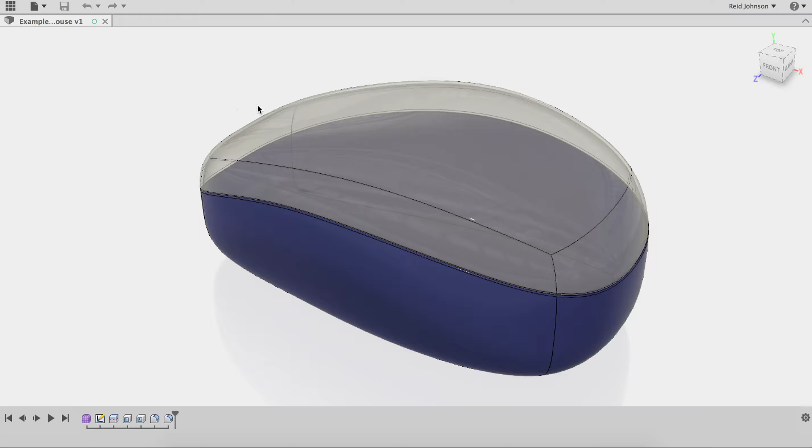The next part of the mouse to create is the track wheel or middle mouse button. So to do that, we need to create a sketch and create an opening for that mouse wheel.

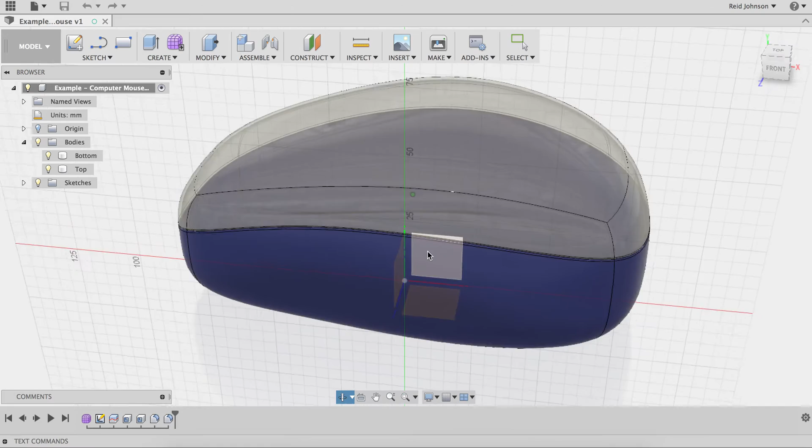I'm going to start by initiating the sketch command. I'm going to find the circle, the center diameter circle, or C. And again, I want to pick this plane that splits the mouse right down the center there. So select that plane, and I want to create essentially the hole for the mouse wheel.

I want to start the center of that somewhere down in the mouse. I click one time to set the center point, and I pull the mouse away. Imagine the wheel protruding out of the mouse. I click a second time to set that.

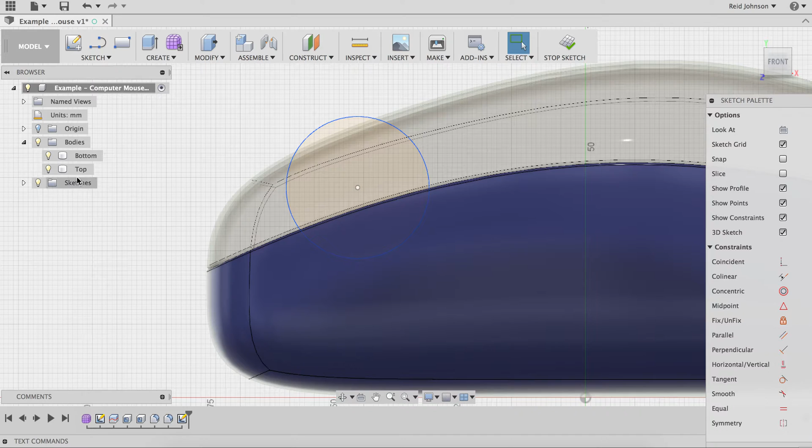Now, if I'd like to make a change to that, it's pretty simple to do. I can click and hold, and find something called the sketch point. With that selected, I can move that around. If that's difficult to do, I can temporarily turn off these pieces. It lets me click and drag and move this around to make minor adjustments. I can also drag the outside of the circle to change the diameter.

Once I'm happy with that, I can look at that in 3D. Looks good. I say stop sketch.

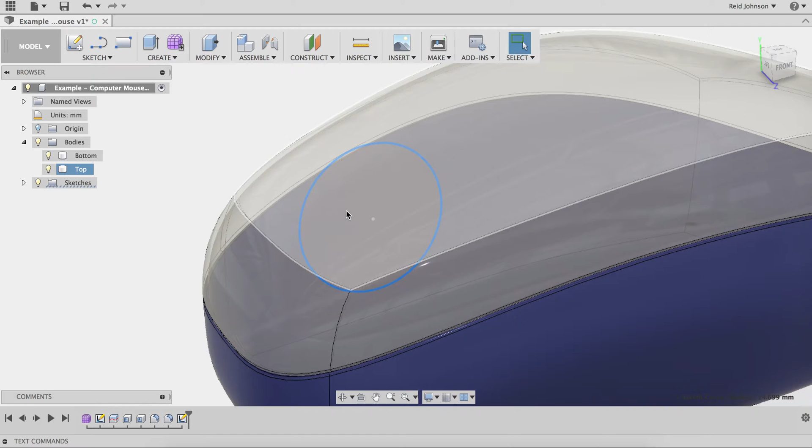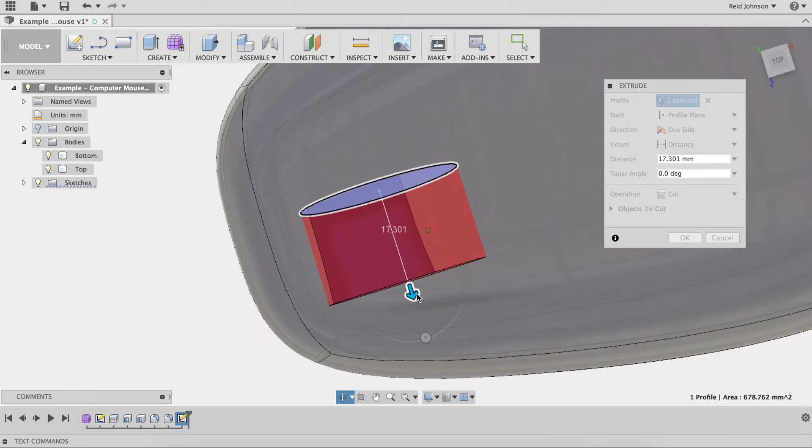And now I go to modify, press pull, or Q. I select this circle I just drew, and by dragging the arrow across, I notice it's going to cut, and you can see at the top here, create an opening for the mouse. The problem is it's only cutting from one side over, and that's where my extrude menu comes into play. I want to change the direction from one side to symmetric, and now as I drag the arrow, it's keeping that centered about the mouse.

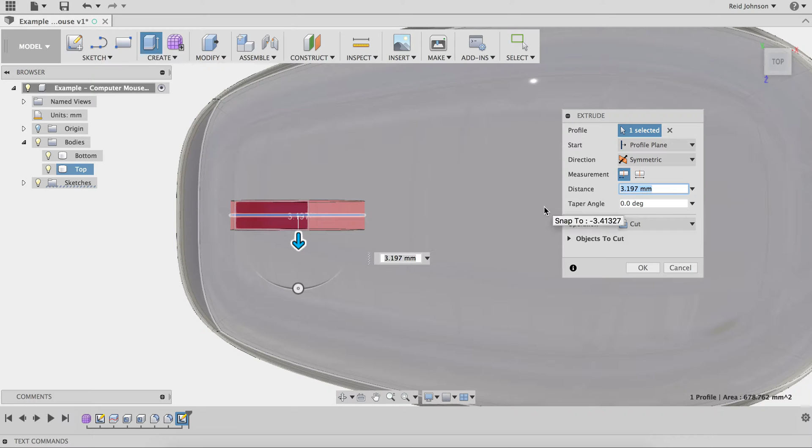Now I can decide what thickness I want this opening to be, or I can type in a dimension. I'm going to go ahead and type one in here. And I'll say OK when I'm happy with that.

And there it is. I've got an opening in the top here for that track wheel. See, it follows the curve. It's a great opening, just what we need.

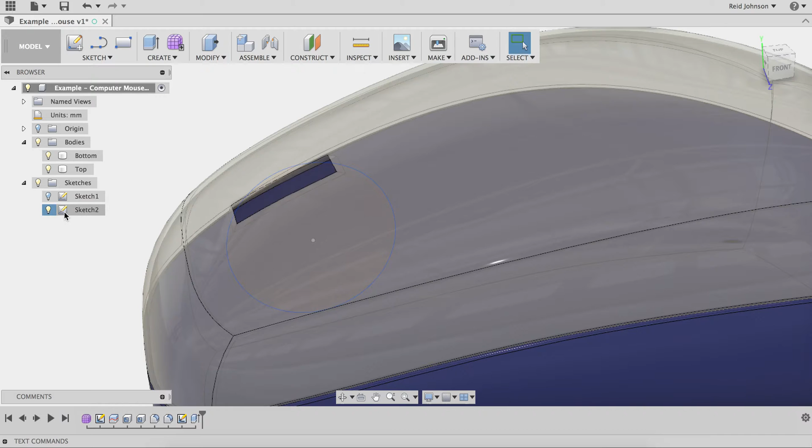Now I want to go ahead and find that sketch. That's going to be sketch 2. Use a light bulb to turn it on because I want to use it as a reference to actually make the wheel now. So I'm going to create another sketch.

I'm going to create a circle, center diameter. I'm again going to pick that middle vertical plane. Using this sketch as a reference, I can click on the same center point, since sketch 2 is turned on. Click the center point, it's going to snap to that. So these two line up.

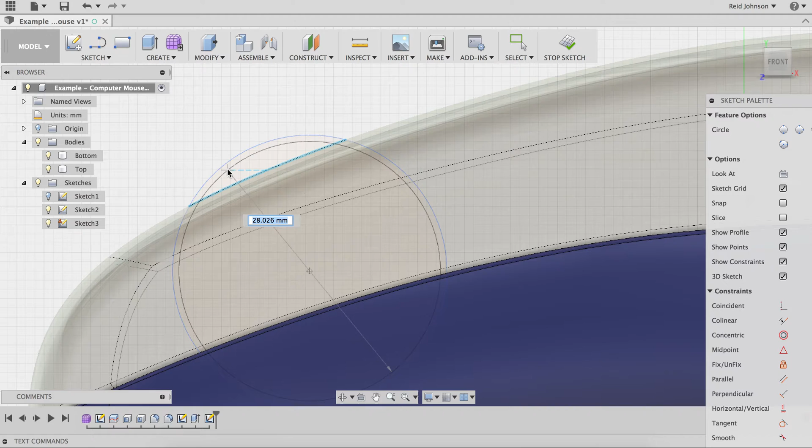And I want to make this circle just slightly smaller than the original. So I can type in a dimension, or I can zoom in and find that. Click a second time, it's going to set that circle.

A quick side note, if you're finding that it's a little bit jumpy when you're sketching out, look at your grid and snaps and make sure snap to grid and incremental move are turned off, and you'll have a smoother experience there. Once I'm happy with that, I'll say stop sketch.

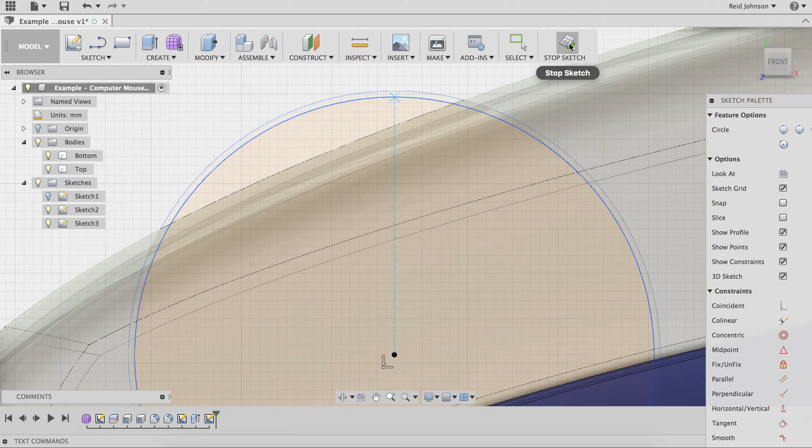And now I notice I can turn off my sketch 2. I've got this sketch 3 just inside of that, and that's going to be for the wheel. Go ahead and turn off sketch 2.

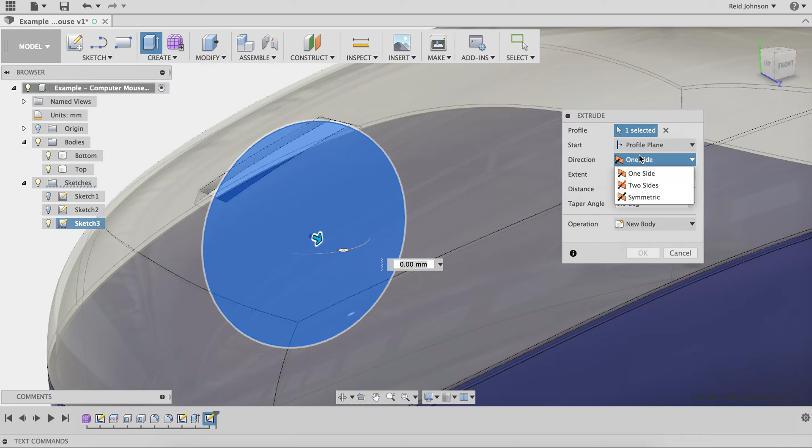And with sketch 3 visible, I'm going to do a modify, press and pull. Click on that sketch, that's the wheel size. Change my direction to symmetric, and I can flip to a top view by clicking the top here.

And I can use this blue arrow to drag this out and create the wheel. Now I don't want to go too far. If I go too far, I'm going to exaggerate. It's going to start to cut, and that means that they're overlapping.

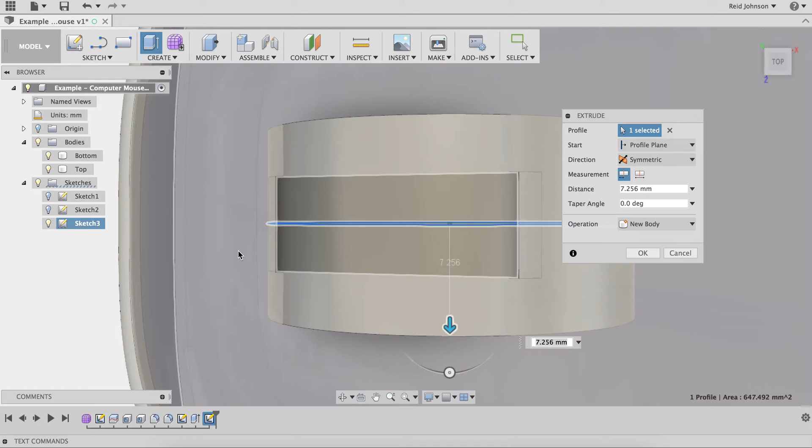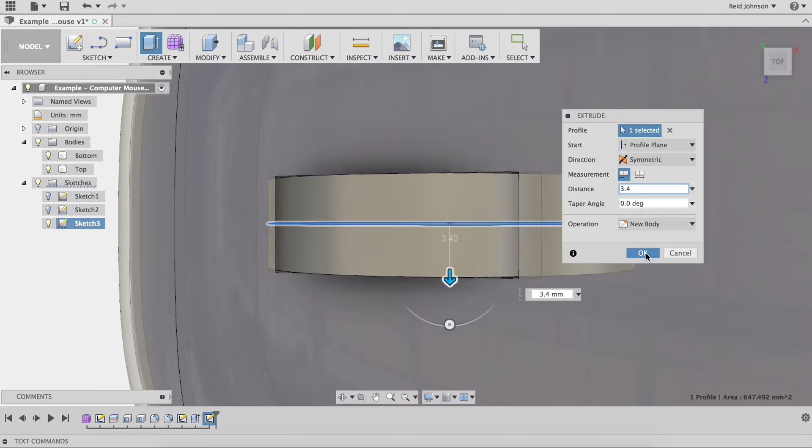Now I know that my last one I did 3.5, so something like 3.4 will be just shy of the hole. And I can say OK. And there it is. I've got the opening and now a wheel just inside.

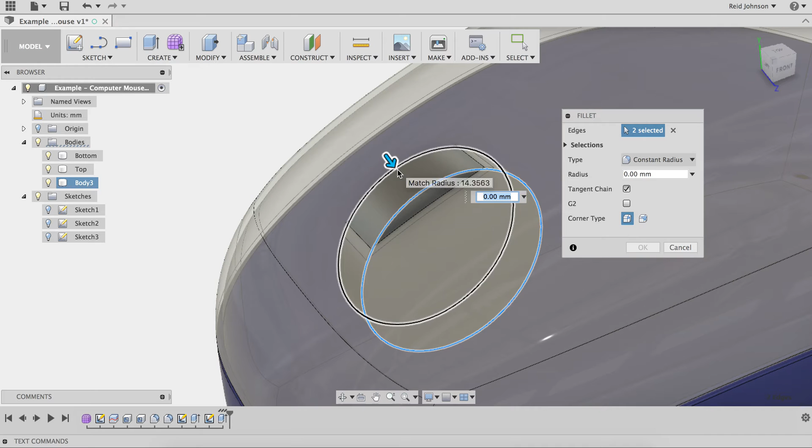Now I can add some detail to this. One of the easiest things I can do is go to Modify, fillet, grab each side of the wheel, and this little blue arrow lets me drag that in and round off the wheel. I'll round off the side, something like that, and say OK.

And I can also give this wheel some material. So go to Appearance. Maybe I want to make this the blue plastic. I'll drag and drop. And there we go.

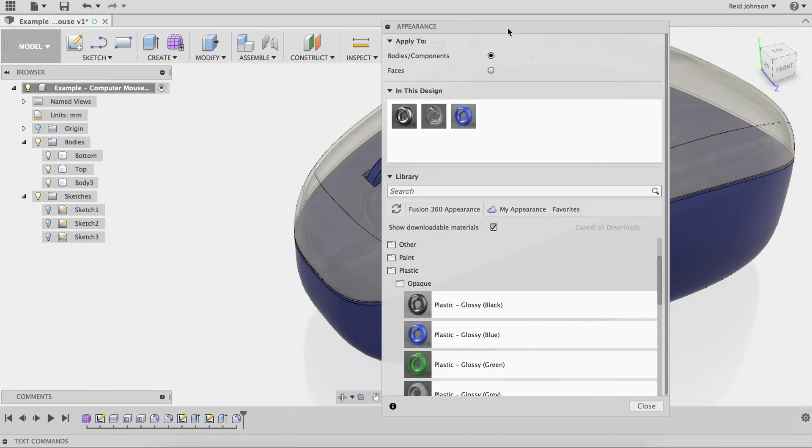Alright, so I've got the wheel, I've got the top, I've got the bottom. I want to name this wheel, so I right click or double click and do wheel. And now I want to add in a cord for this mouse.

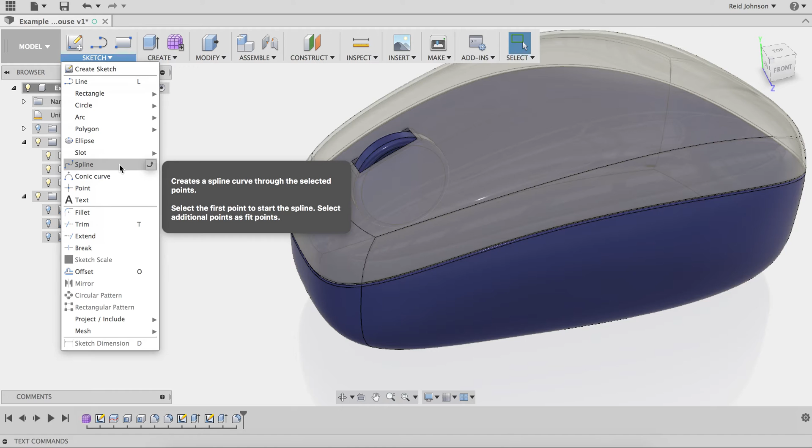I'm going to do that by using the sketch command. I'm going to go to sketch, I'm going to do a spline. I'm going to pick the ground plane this time, that orients me to my top view. I'm going to start somewhere out here a little ways.

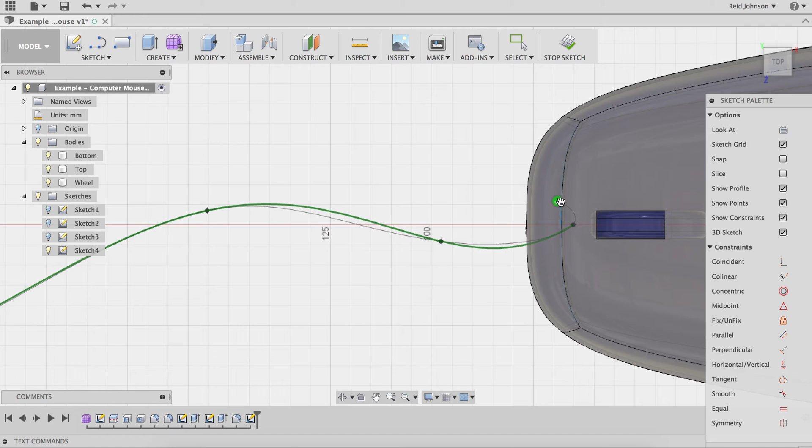Click, click. I want to bring that just inside of the mouse, somewhere in here. I do this little checkbox to make that spline what it needs to be.

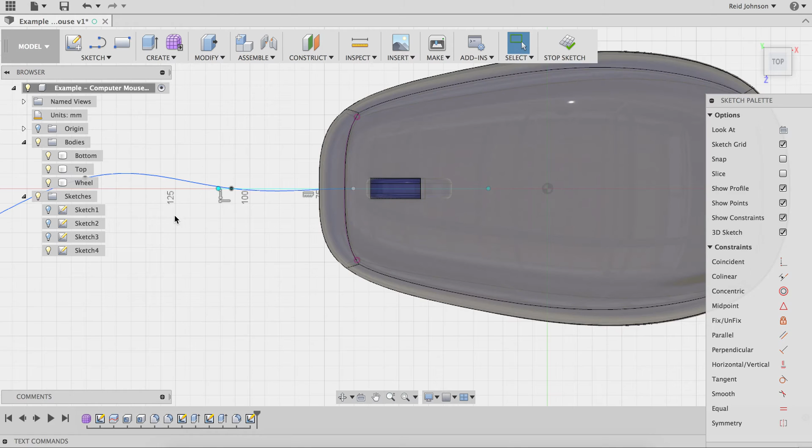And now I have these extra additional tools here now. These green lines I can use to really control what the spline is. I can drag the spline lines around. I can orient these so that this will behave the way I'd like it to. So make these adjustments, get this to look how you'd like it to look.

Once you're happy with that, there's one final step. You'll notice this chord is sitting on the ground, which is fine until I get inside of the mouse here. And here I don't want it on the ground, I want to move that up.

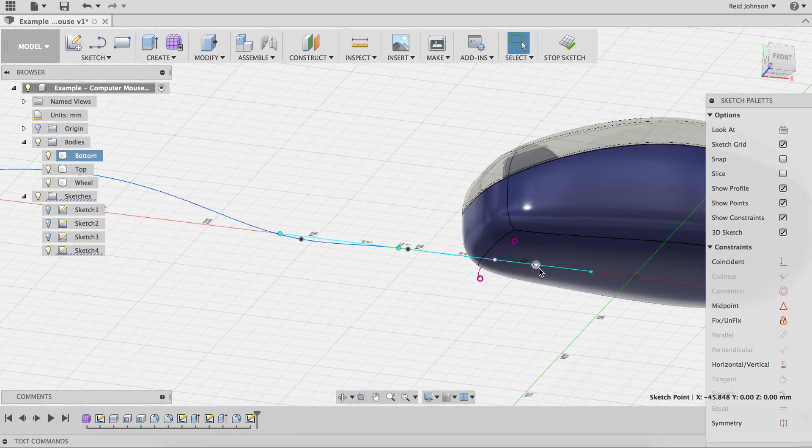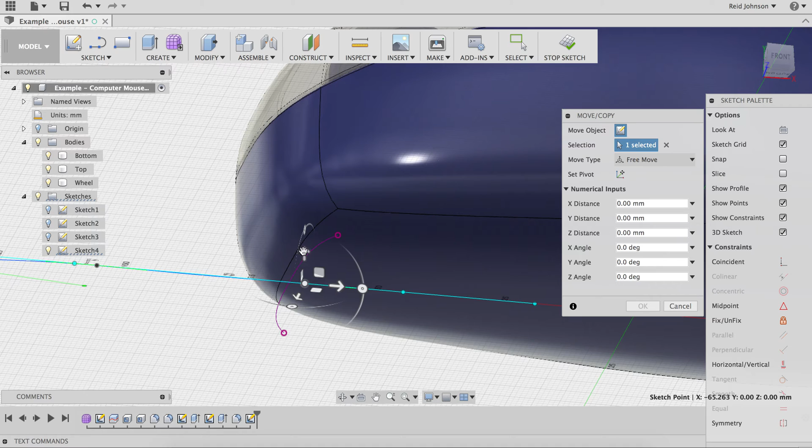So I select this point, the last point in the mouse here, and I can right click and I can pick move. And with that, I get a little triad and I can drag that up off the ground. If it doesn't drag, that means it might be constrained, I might need to select something else to get it to work. But let's try one more time. There we go, had to grab the right thing.

So I drag that up off the ground, somewhere like that, so the line is now going into the mouse. If I click on the front view, I should get a clear view. The chord's laying on the ground, it comes up, and it drags up inside of the mouse.

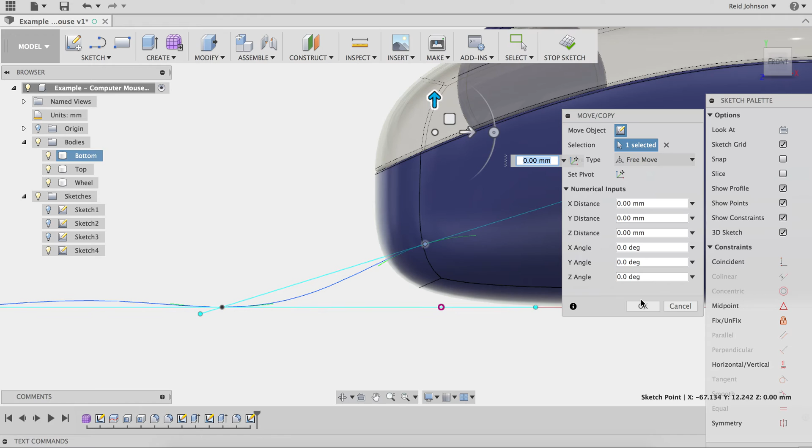And I can move some of these others as well. I can say, okay, on that one, pick a different point and say move. And I can drag this up as well if I'd like to, a little bit off the ground. So there it is, I say stop sketch when I'm happy with it.

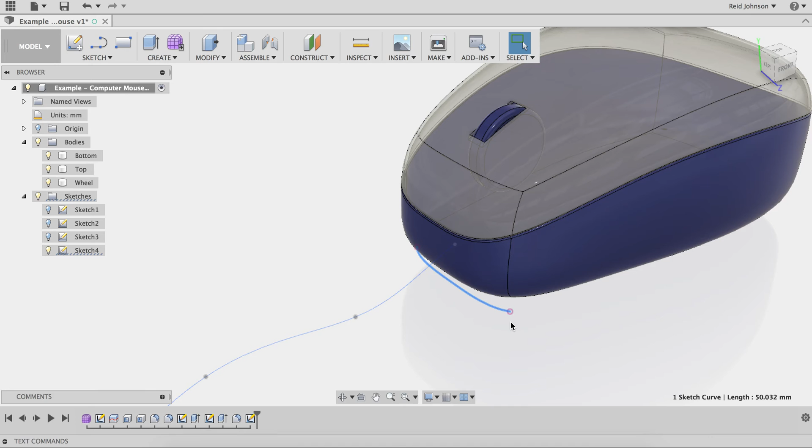You can see this purple line here, that just picked up a little bit of context when you overlap bodies and lines. Sometimes that happens, they're there to be useful. You can turn that feature off if you'd like. Alright, so there is that line.

Next step is to create a pipe. And it asks me to select a path, that's this wavy line I selected, so there it is. Distance, so 1 means it's going to go the entire length. If I did halfway, it's only going to go halfway there. Definitely want to go the whole way, so do 1.

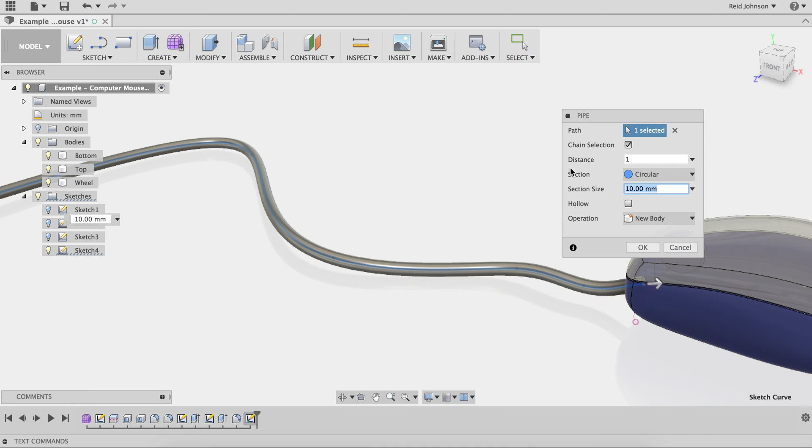Section size, I can drop this down, something that makes more sense for the cord for the mouse. And I can select new body to make sure it's its own element. It's a new body, if I wanted to, I could make it hollow. I'm going to leave mine solid, that's fine for now, and say OK. And there is that cord.

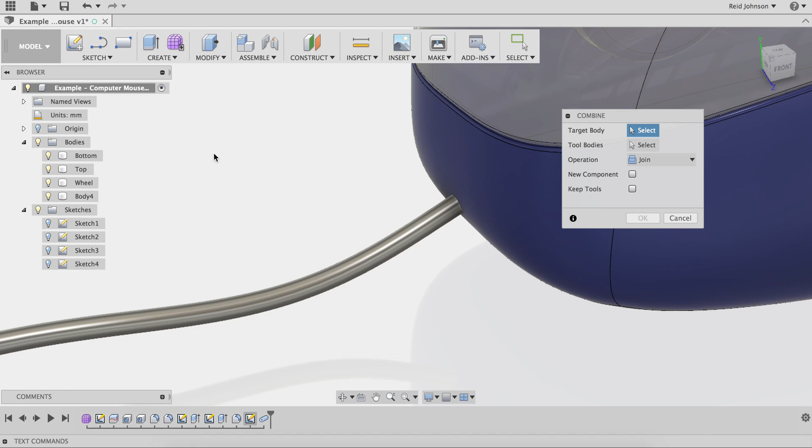So pretty cool, one last trick. I could do modify, and there's something called combine. And I can pick my target body as the mouse, I can pick my tool body as this cord, and instead of join, I can say cut.

That's going to make a hole for me here. But I want to keep the original cord, so I want to say keep tools and say OK. And now there's a hole there.

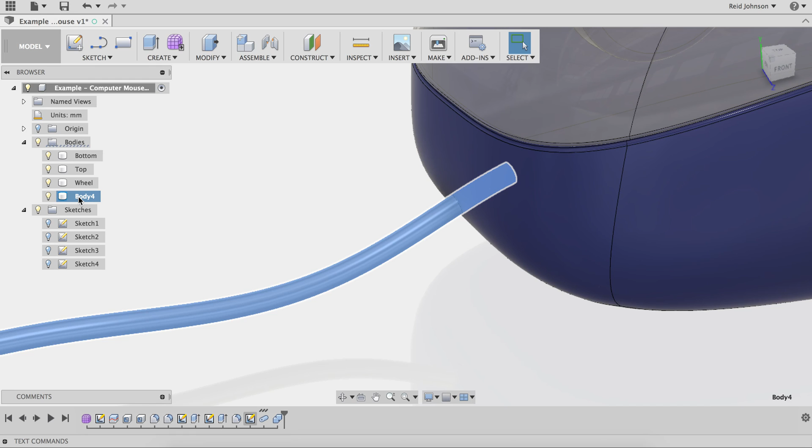So if I turn off this body 4, I'm going to rename it by double clicking on it, this is the cord. Turn that off and notice I've got a hole with a little trick.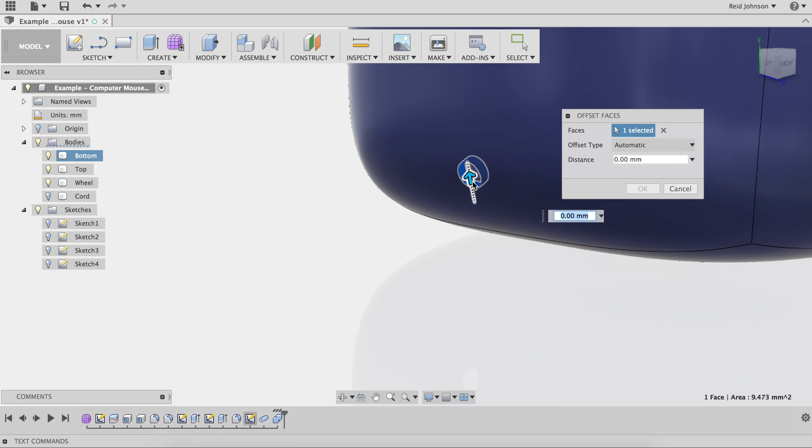And if I'd like to make the opening larger, I can go to modify, press and pull, click on the inside face. I can hold and click if I want to get that face selected. And I can drag, make that opening a little bit bigger, say OK.

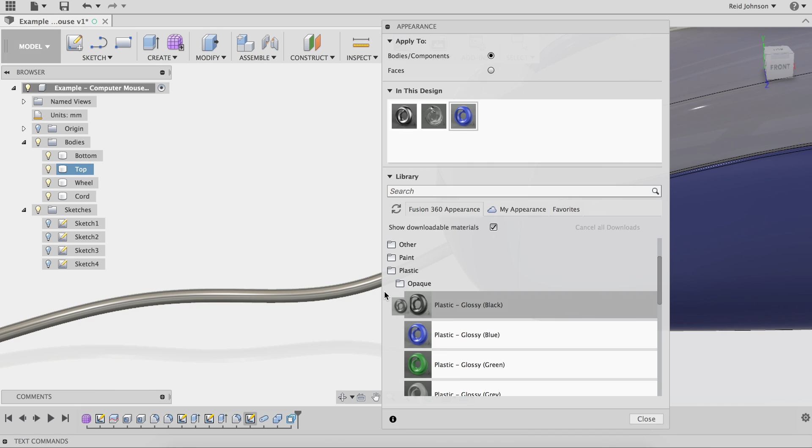Turn on my cord, I can see the cord's going to go in there nicely. Alright, now I can right click and do appearance. And I want to do, maybe I'll make this blue. Let's go, we'll keep it classic, we'll do black. Say close.

Now we've got the mouse. We've got the cord, we've got the bottom, we've got the top. We've got the wheel, and it's looking pretty good.